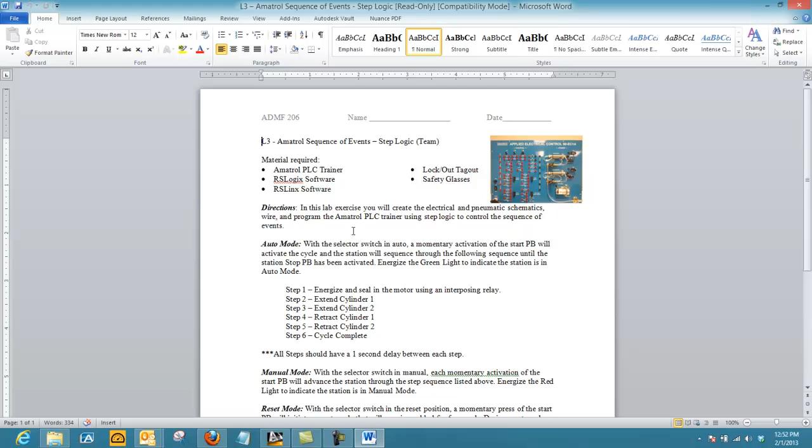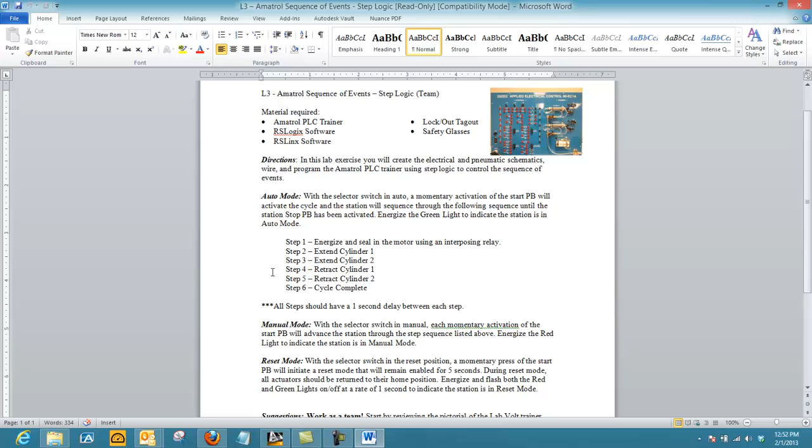So these are our objectives. In this assignment, we're going to create the electrical and pneumatic schematics, wire and program, like we said before. Here are our modes of operation. We have auto mode, manual mode, and reset mode. Here it's going to give us better descriptions of how to achieve these. But these will be our steps. Step 1 is going to be energize and seal in the motor. Step 2 is extend cylinder 1. Step 3, extend cylinder 2, so on and so forth. And we'll get to that when we start programming our RSLogix.

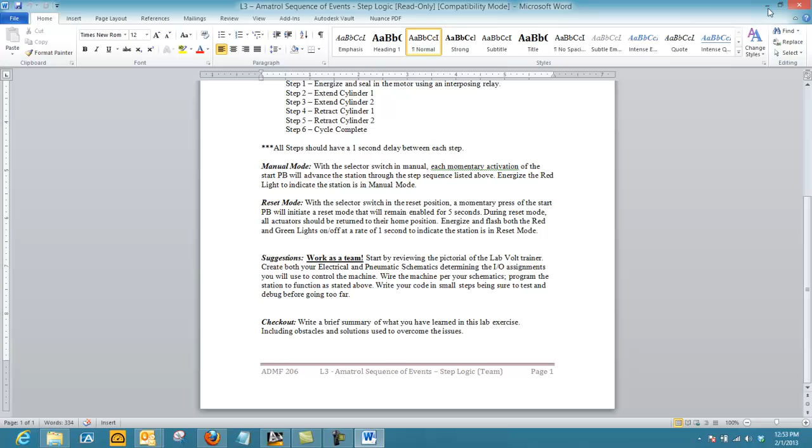So I've included a picture here so you have a reference of what the PLC station looks like. But in the suggestions down here, it tells you to start by reviewing the pictorial of the LabVolt trainer, then create both your electrical and pneumatic schematics, determining the I/O assignment you're going to use to control the machine. So that would be the first thing we're going to do. So we're going to go ahead and close this, or minimize it for now.

And I'm going to open up the AutoCAD Electrical software, which I have running already. And you're going to see it opens up with a blank screen. Just make sure that you are using AutoCAD Electrical, as noted up here in the title bar. First thing we're going to do is we're going to get a template. So we're going to click the big A up here in the left-hand corner. We're going to go to New and do New Drawing. And we're going to choose the AutoCAD Electrical and hit Open. And now you can see that that has brought up a template for us.

Remember, we can pan and zoom by pushing down the scroll wheel of your mouse. And you can see it has just changed to a hand, and I'm going to move this over by just moving my mouse to the middle of the screen. Okay, so now we're going to start adding some components, but we don't know what to add yet, so we need to go back to our assignment, and we're going to pull up the Amatrol MicroLogix 1000 JPG.

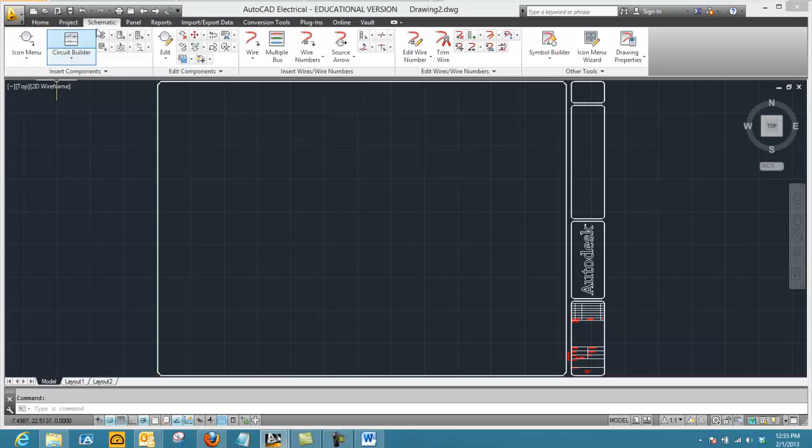Okay, and here you can see the image of the documentation that coincides with this particular PLC. Noticing here it's a MicroLogix 1000. It's a 1761-L16BWB, and that's the important information that we need for AutoCAD Electrical. So now I'm going to go back to AutoCAD Electrical, and I'm going to choose a 1761-L16BWB by clicking on the Schematic tab, then the Icon menu. And it's telling us it needs to put some information in our drawing. That's okay. Go ahead and accept that.

And I can click over here on any of these over here, or I could click over here on the images. Anytime you see a plus button associated, that means there's more information, so I expand that. And I'm going to expand this again. Now I'm going to choose the MicroLogix with a 1/2 inch spacing, but before I do, I'm going to change my schematic scale. I'm going to change this to 2.25, and then I'm going to click on the 1/2 inch MicroLogix spacing.

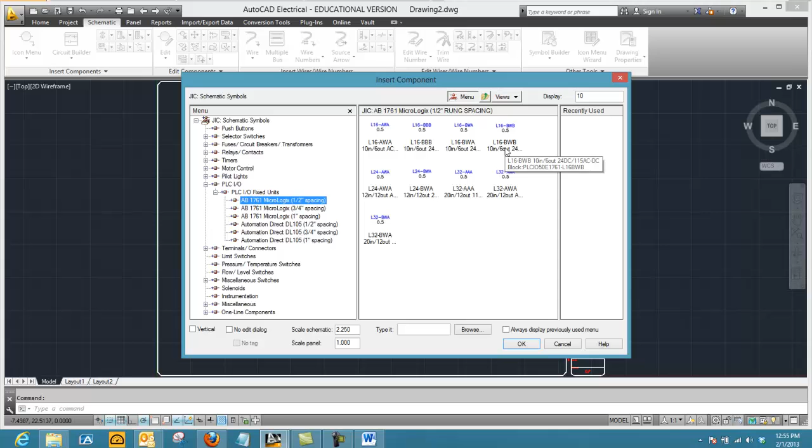And now you can see the options come up, and we want the L16 BWB. So I'm going to click on that, and you're going to notice that it comes into the drawing, and then just moving it around, we can place it wherever we want in our drawing. And we're going to place it roughly in the middle of the page, and then click with a left click.

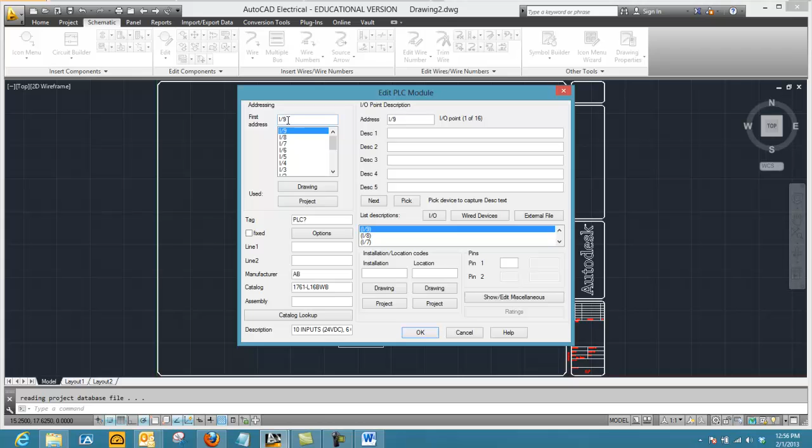Now it's coming up to edit the PLC module. We can tell it what we want the addresses to be, but for this assignment we'll just stick with the default, with the first address being I/9, and I'm going to hit OK. Alright, so that is our PLC. It is on our piece of paper. These are going to be our inputs and our output connections.

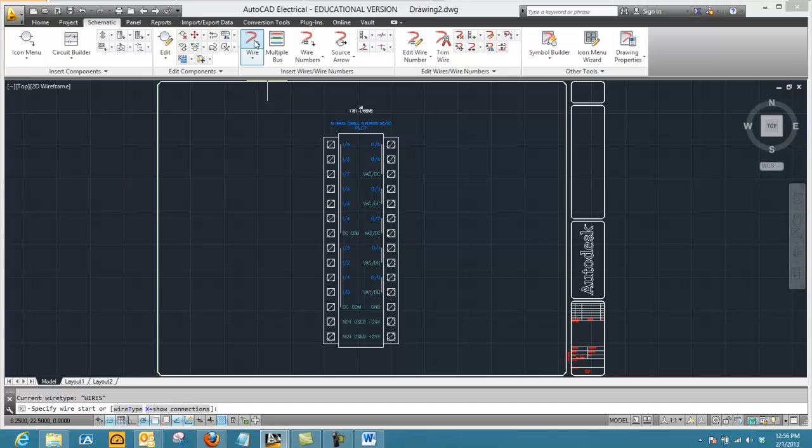And we know that it is a DC PLC, so we're going to have to add some wire connections to it. If we come up here to Wire and click Wire, that will make our wire menu active. And I'm going to come down here to the DC COM, and I'm going to zoom in so you can see it better here. If you can see right here, this is our DC common. Notice when I get over the side of it, it turns to a green hourglass. That means there's a wire connection there.

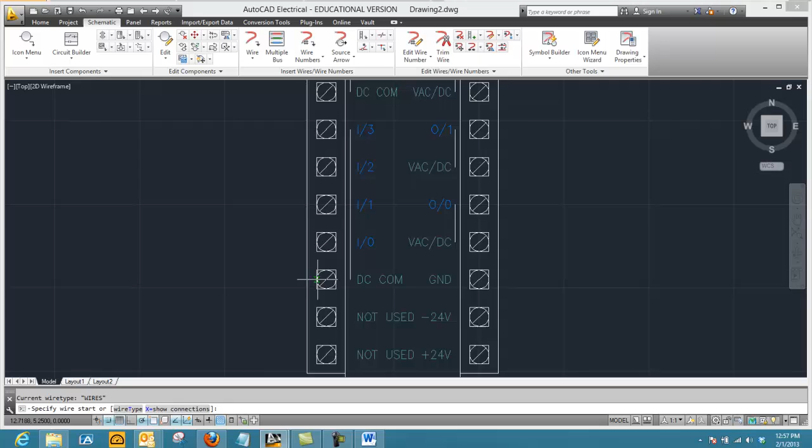So I'm going to go ahead and zoom out now, and I'm going to go ahead and click on that. And I'm going to move to the left with my mouse, and then I'm going to go up to the top, and this is going to be my L1 connection. I'm going to bring it up to about here, trying to keep the line straight, and then I'm going to left click again. Now notice if I move to the right, I've got another line. If I just hit my space bar, that will exit the line command. So there I have a line.

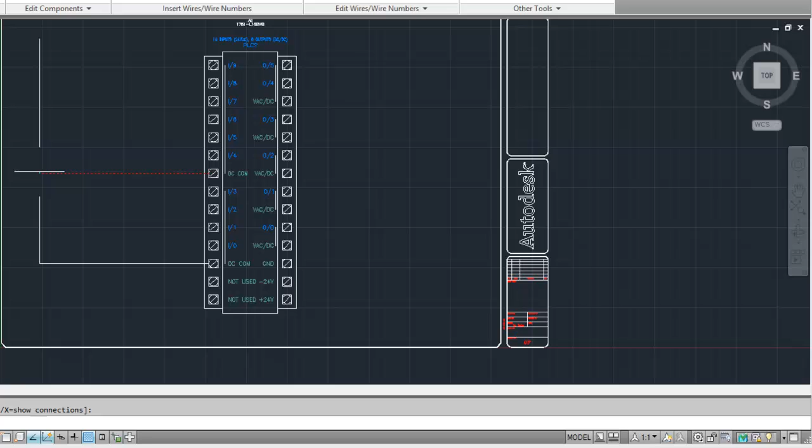I have another DC common here, so I'm going to just come over here, get on the center of that terminal screw and connect. Come over here, and when I get lined up, the line turns red. I'm going to click again. Now notice there is a wire connection there with that node, meaning that the wires are connected. Okay, so that takes care of those connections for us.

Now we're going to have to start putting in our inputs. So the easiest way to do this is come down to your first input, draw a connection, left click and hold, come over and about somewhere in here, go ahead and click again, then come up and try to keep it lined up with the top one, and click again. And now notice that I still have a line active here, so I'm going to hit the space bar.

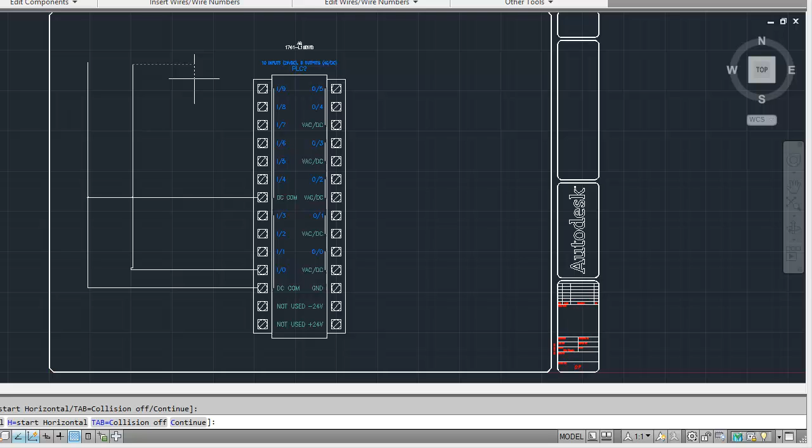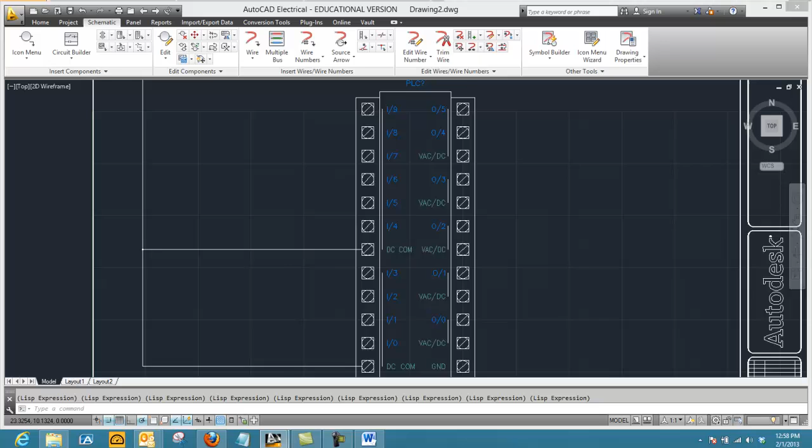But if you notice down here, I don't really like how that ended up doing, so I'm going to undo that by pressing the Control-Z key. Hit the Escape key first to get out of any active menus, hit Control-Z, and that line will go away. So let's try that line again. Remember, I'm panning and zooming, so I'm clicking the wire.

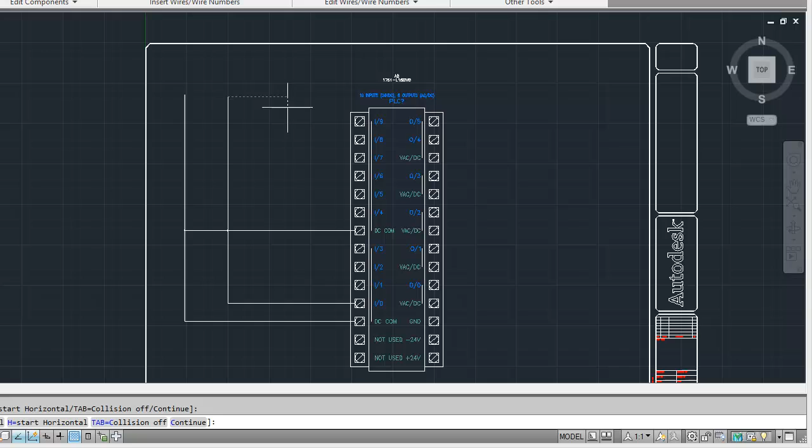And come down here, and when it turns into the green hourglass, I left click. Actually, I don't hold, I just come over here. Now I'm happy with this right about here. I'm going to go straight up. And the goal here is to try to keep that line straight. And when it turns green, we're ready to click again. And now we're going to end the command by pressing the space bar. And now you should see that those lines are crossing over, meaning the wires are not connected.

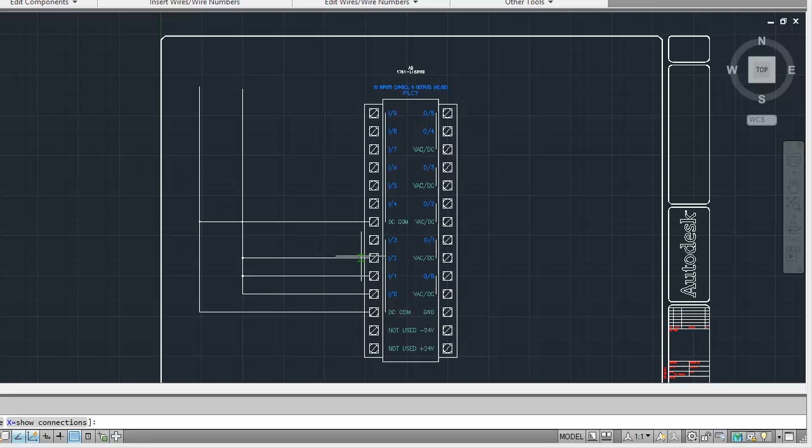Okay, so now what we're going to do is, however many inputs we're going to use, we're going to go ahead and draw the lines. So I'm going to click here, come on over, and when I get there and it turns red, I'm going to click again. I'm going to do this for about 3 of them. Click, come over. Once it turns red, that means I can connect the wires there. Click again, and I'm going to do one more. Click, and then come over and click again. Okay, so I've gotten these wires already in there.

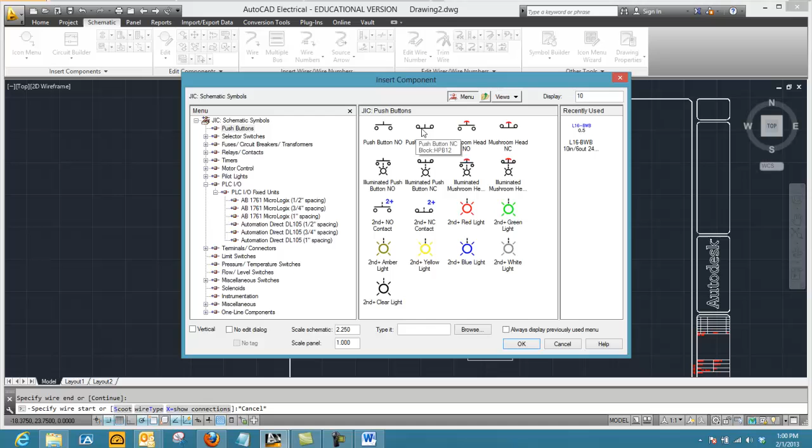Now I'm going to start adding some of the real-world inputs to it. So I'm going to click here, and I'm going to put in a push button. I'm going to start with a normally closed push button, and notice that when I click it, I have it in my cursor here, and I'm going to line this up on the vertical here so that we can keep all of these nice and straight.

And when I have it there, I'm going to left click, and I'm going to call this a stop PB. We can give it a description if you like, or you can keep it just with the component tag. And I'm going to hit OK. Now you'll see that button is in place.

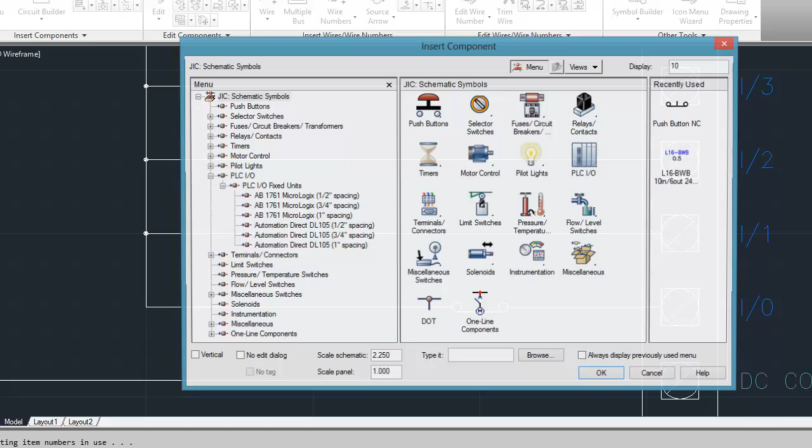Now I'm going to grab another one. I'm going to go grab another push button, and then I'm going to grab a normally open push button. Notice that I still have it in my cursor. Bring it up here on the vertical, and when I get to, whoops, we want to come down here. And I'm going to click, and that places it inside the wire. And then I'm going to hit Start PB and hit OK.

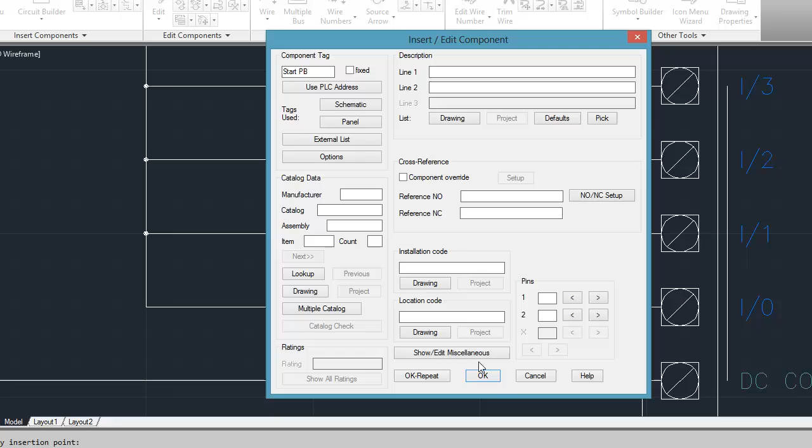So there you can see I have two of the inputs, the real world devices, already attached to the PLC card. And I'm going to let you work on adding the rest of them. So now let's go ahead and put in our outputs. Here you can see we have a plus 24 and a minus 24, which is going to be the power to the actual PLC. So we're going to start by adding a wire.

Come over here, and when we get to the middle and it turns to the hourglass, I left click, I move to the right, and just like I did before, I'm going to come up and over and keep them on the same plane as we have on the left side and click. Okay, I still have a wire, so I'm going to hit the space bar to exit that.

Then we'll do it again, come over here, and I am going to click. So I have a plus 24 and a minus 24. So I'm going to bring this one up, and I'm going to bring this over to about here and click. Okay, notice it's still active, so I press the space bar and it cancels that command.

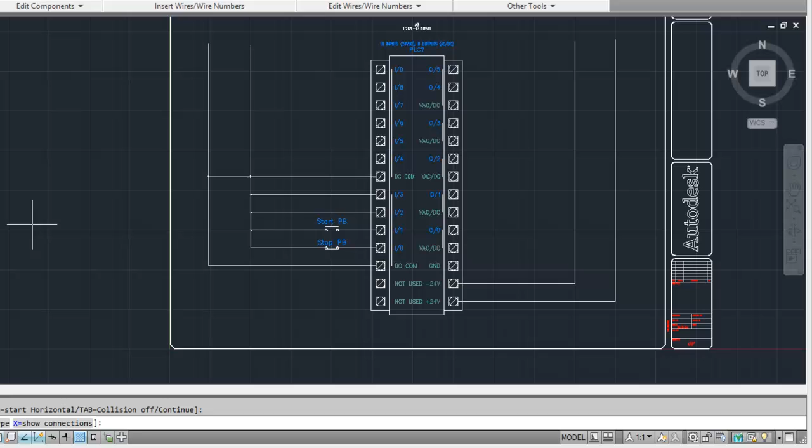So for the outputs, well, we have to determine what types of inputs and outputs we're going to use. If we look at the requirements, it says I'm going to be energizing a motor, extending a cylinder, retracting a cylinder, and ultimately having a cycle complete. So let's take a look at our trainer. Going back to Blackboard, looking at the assignment, we have the inputs here, we have the outputs here, and we have the image of the actual trainer.

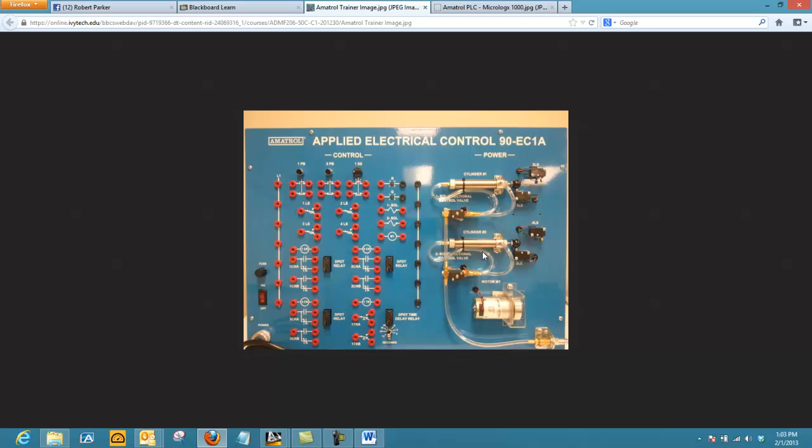So I'm going to click here, and this is our actual trainer that we're going to be programming. I'm just zooming in a little bit here. I have cylinder 1, cylinder 2, and I have a motor. I can see that these cylinders are being controlled by a directional control valve, each one having their own solenoids. So if I come here, I see solenoid 1 associates with this solenoid 1.

Solenoid 2 associates with this solenoid. The M1 corresponds to the M1 here. And we have the red light and the green light. So being the designer, we can choose whatever output we want to connect to the PLC. So I'm just going to choose a red light. So now I'm going to go back to AutoCAD.

Activate that. And I can use any of these outputs: output 0, output 1, 2, 3, 4, and 5. But notice that each output has its own volts AC/DC common. So that means that this group of outputs can use either AC or DC, and we could split them up if we wanted to. So I'm going to go ahead and grab that output now.

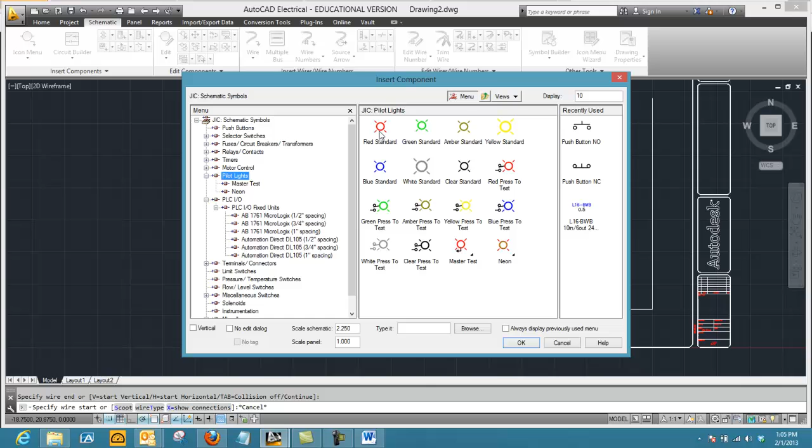If I come over here and look, I have an icon for pilot lights here, or I can come over here and click the plus button and find pilot lights here. So we have master test, we have neon, and we have just the typical pilot light menu. I said we were going to use the red one, so I'm going to click red, bring it over here, and again I'm going to try to line this up on a vertical grid bar. So we'll come over here.

Whoops, before we do that, we should have put our wires in. So I'm going to hit the escape key to cancel that, because it's easier to add the wires first. So we're going to hit the wire, come over here to output 0, come over here, and we're going to be connecting it to the minus 24 volts, which would be our common.

We'll do the same thing for this one here. Come over here and add another one, and when it turns red, that means it can make a connection there. And I'll do one more for you. We'll click, and we're going to come over and then click again. So there we've got our wires inserted and attached to the 0 volt side, or the minus 24.

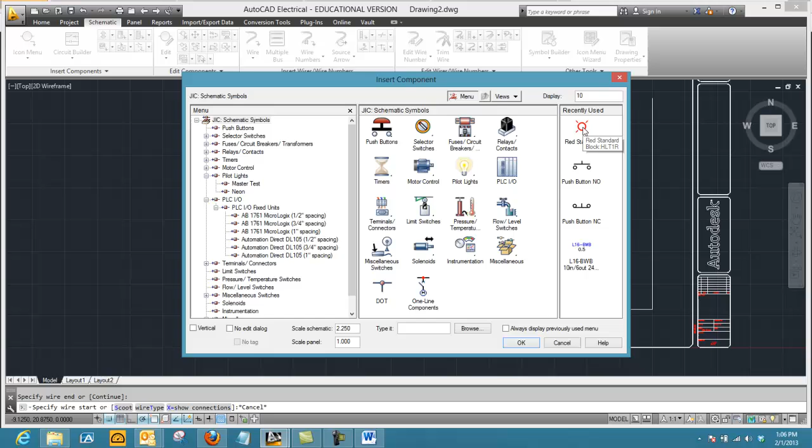So now I'm going to go back to the icon menu and get that pilot light. Notice our recently used are over here, so I could just grab this one and come over, and I'm going to insert it. I'm kind of thinking that right there might look good, but this one here, we're probably just going to go in the middle, so it seems to look best. So I click, and notice that it came in.

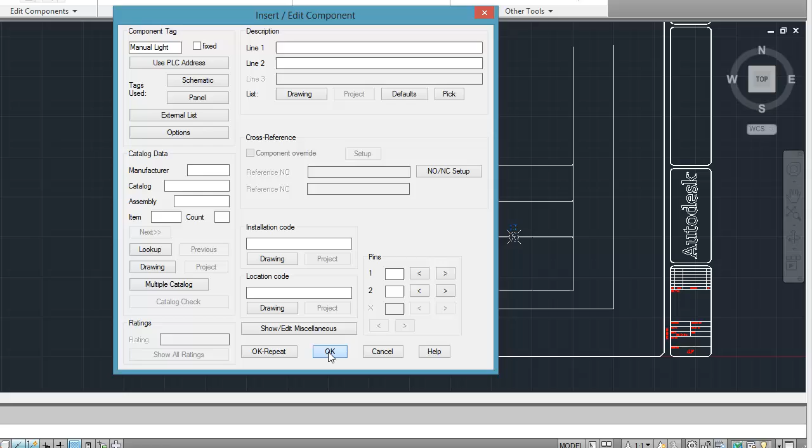And here I can call this the auto light if I wanted to, or I could call it the manual light and hit OK. And there you can see it puts the output graphic symbol in there, and it also puts a description of it. So let's grab another one.

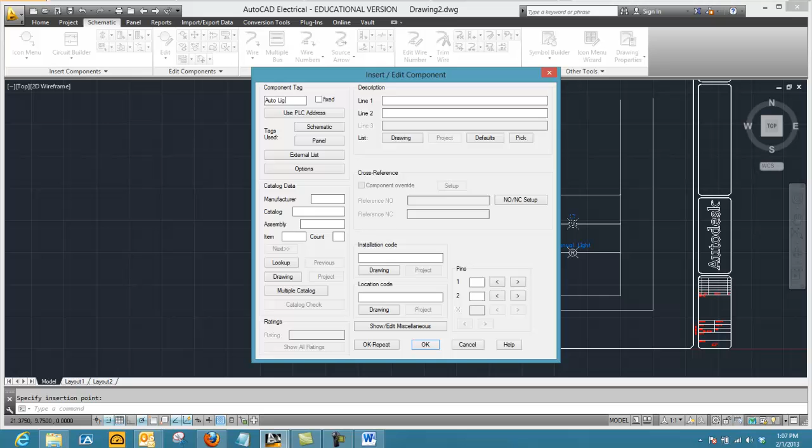And now, since we don't have the green one here, we're going to click Pilot Lights, hit the green one, come over, and again, just trying to line these up. I'm going to go ahead and click right here. And if that was manual, then I'm going to make this auto and hit OK. So I've got a red light and I have a green light.

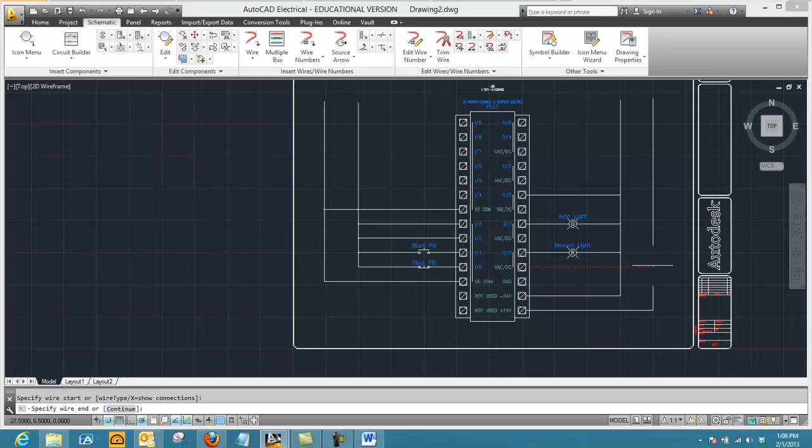Now I must connect the power to the actual module on the volts AC/DC. So I'm going to grab the wire, come over here, attach right here and click. Come over here, and I want the plus 24, and then I am going to click there. You'll see we'll have a wire connection there. See the node? Do the same thing here.

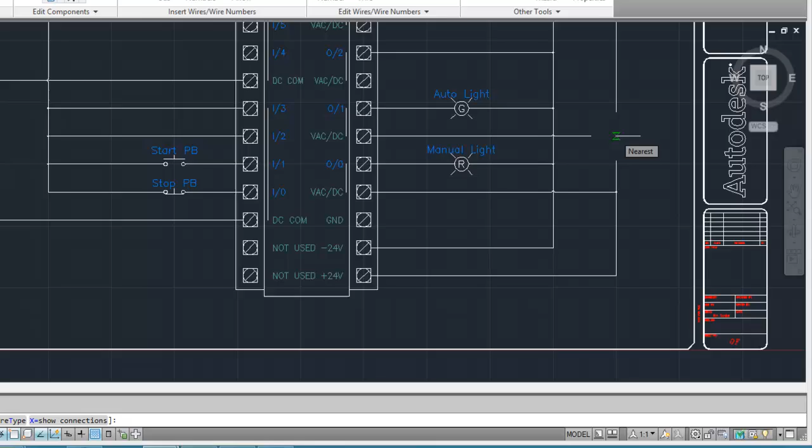Click, come over, and you're going to notice that we just go across that wire, go to the plus 24, and click again. And we have our wire connections there, and we can also see how it has jumped over the other ones, indicating that there is not a wire connection there. So adding any other additional inputs or outputs is relatively easy. It's always best to draw your lines first and then put your components in.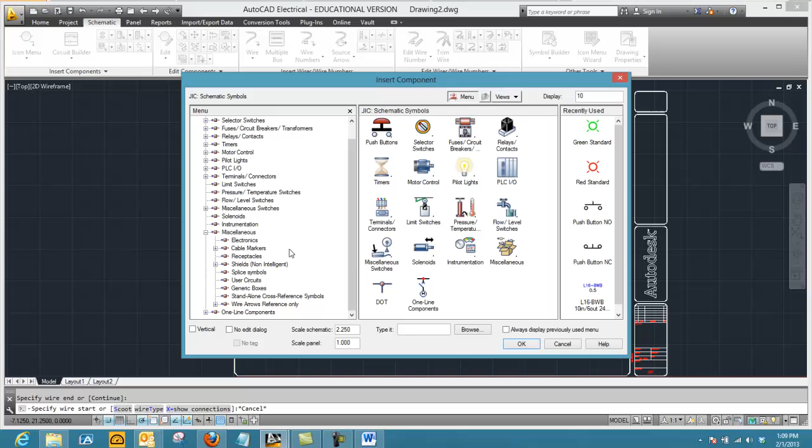Notice I have one left here. We have a ground, so we need to go into our icon menu to find that ground symbol. So we can close these out, and remember, you can drill down through all of these to find whatever content you're looking for. Hit the plus button, and I believe it is in here. If we just hit miscellaneous, there's that ground. So I can come here, click the ground,

and then I can click here as well. But notice how it may be offline now. So I'm going to undo that. I'm going to hit Control Z, which is my favorite undo friend. And then I'm going to try to put the line in first so that we can keep our lines nice and straight. Notice I zoomed in a little bit.

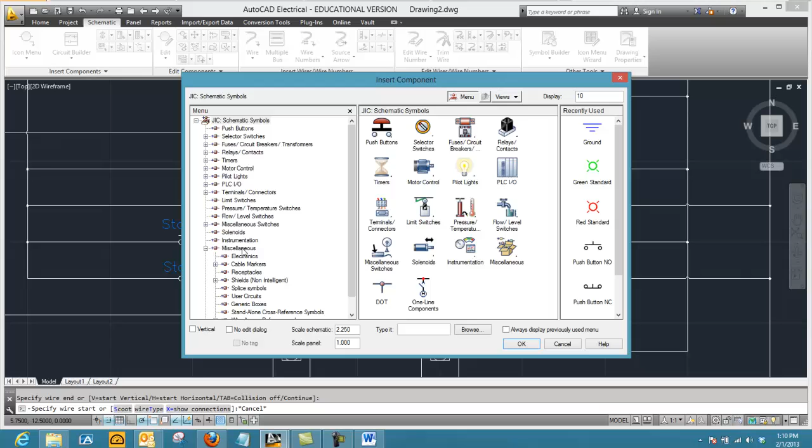I'm going to click, come out a little ways, trying to keep the line perfectly straight, and then click again, and then cancel the wire command by pressing the space bar. So I have a line now. Now it will be easier to put that ground connection in. So I click on miscellaneous, I click on ground, and then if I come over here, we can see that it wants to go right there. So I just left click, and there's my ground connection.

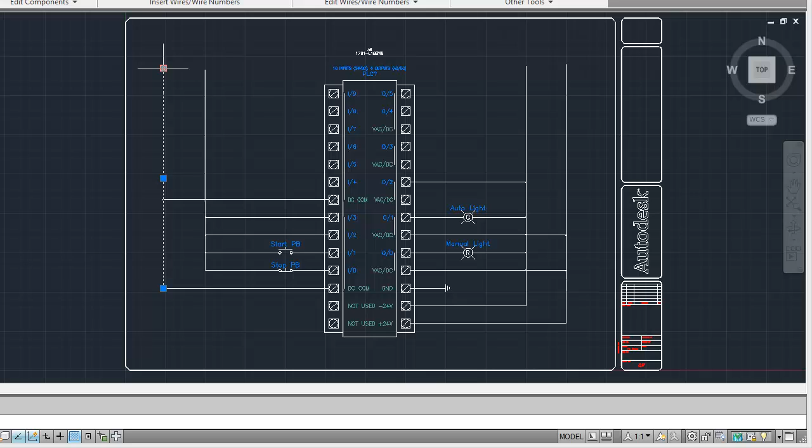Okay, notice that part of a schematic is to keep all of your inputs and your outputs perfectly lined up, your text lined up, and make it a very, very nice good looking diagram. So now we need to label these. So I'm going to click on the line, then I'm going to click on a blue square. I'm going to right click and I'm going to hit the wire number, and I'm just going to click on edit wire number.

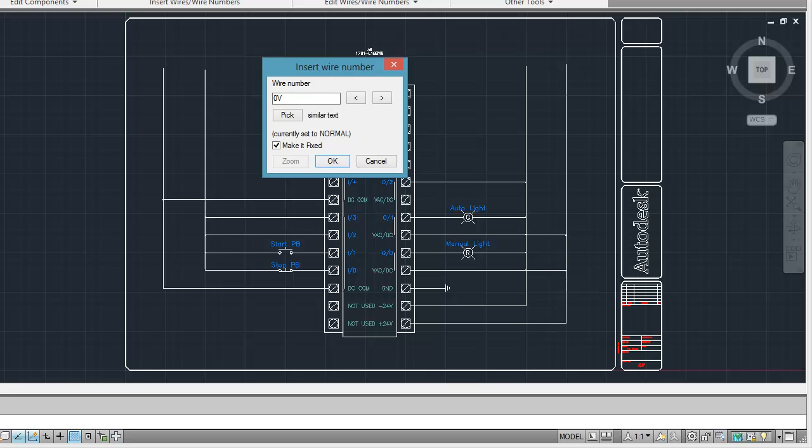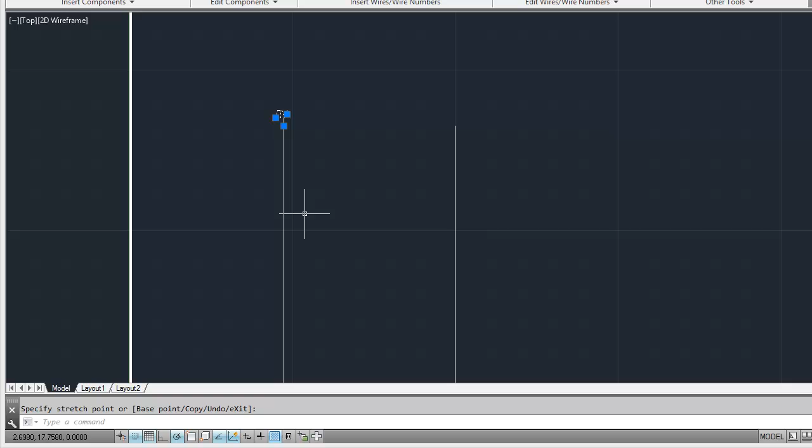And here we're going to call this the 0 volts because this is our minus connection. I'm going to hit OK. And now notice that it connects that up there to the top, and we can see 0 volts right there. If we don't like that there, we can click on it, and then left click and move it wherever we want it to go. So I'm going to click right there and let go. Now hit the escape key, and you can see I have 0 volts.

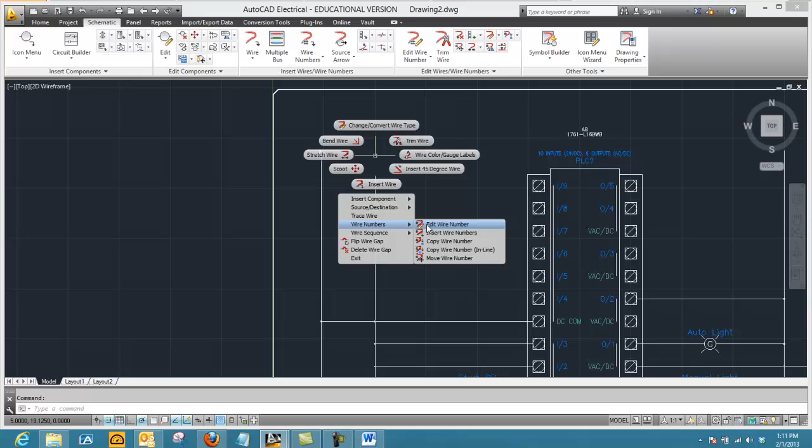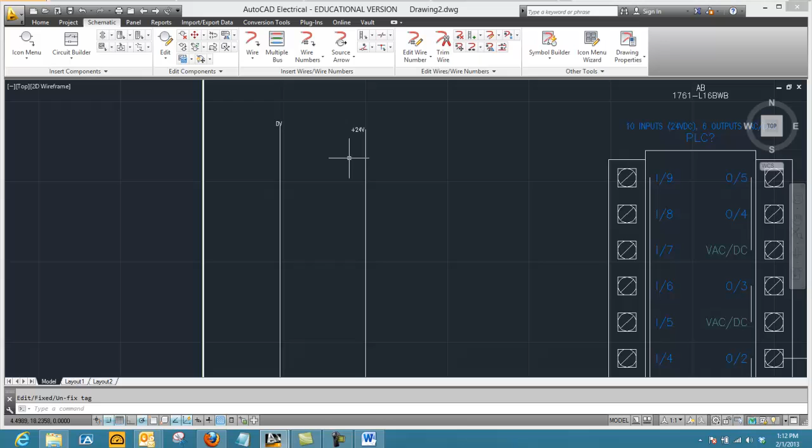Okay, and then I can click here and do the same thing, right click and hit wire number, which we're not really using as a wire number, we're just giving it a name. So we'll hit edit wire number and call this plus 24, meaning positive 24 volts, and hit OK. Now you can see that we have that in our schematic as well. If I click on it and then left click and move, I can put it wherever I want to.

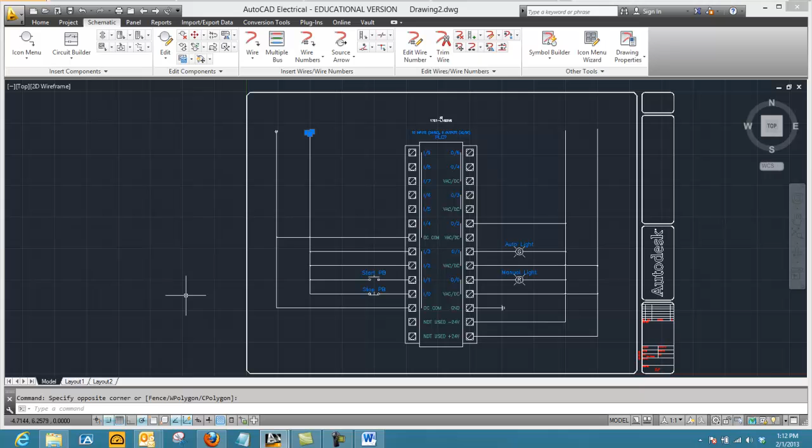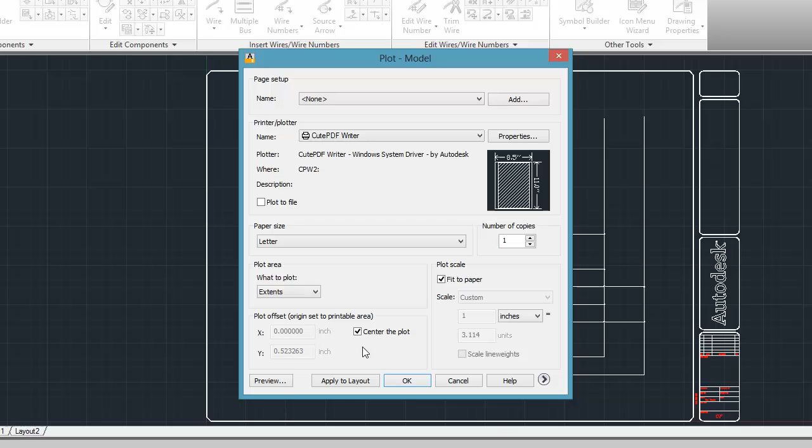Okay, so that is the beginning of your particular schematic. Now to save this schematic, come down here and right click on the model tab, hit plot, tell it what plotter you want to use - we're going to be using the CutePDF writer because we're going to turn these into PDFs. Make sure it says fit to paper, center the plot, and we have several choices here. We're going to stick with display, and you can get a preview here. Let's change that to extents, and you can see we have more area there. So we're going to hit preview.

Okay, so if you were happy with your drawing and liked how it appeared on the paper - you need to do this before you print so you have an idea of what it's going to look like - you would come up here and hit print. But before we do that, let's make another change. I'm going to close the preview window and close this, and add some information to our title block.

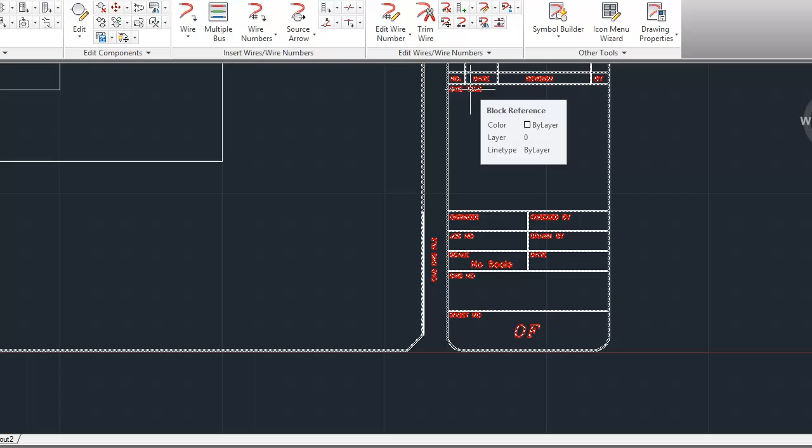Okay, if you see over here, I'm zooming in using the scroll wheel on my mouse. And if I scroll over here, notice that the images change. I can come over any of these items here, over the red, and it changes. I'm going to go to drawing title and double click, and here you can see our attribute editor pop up. Each one of these items that's editable will be displayed. So we have title 2, 3, 4, and title 1. I'm going to click on title 1 and type Ivy Tech, and notice that that pops up in our screen there.

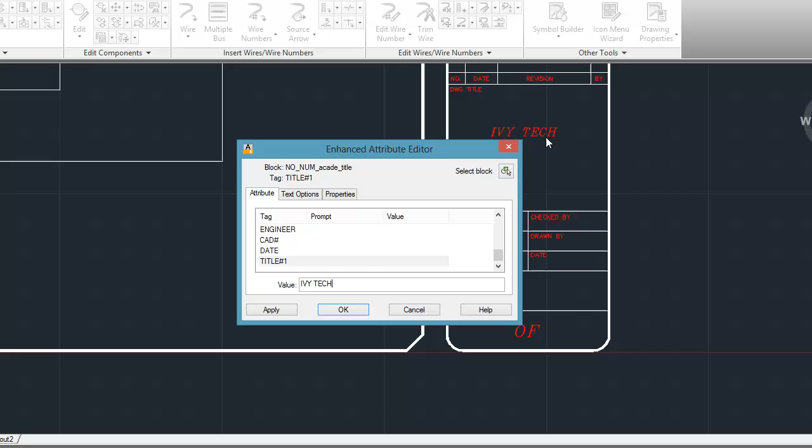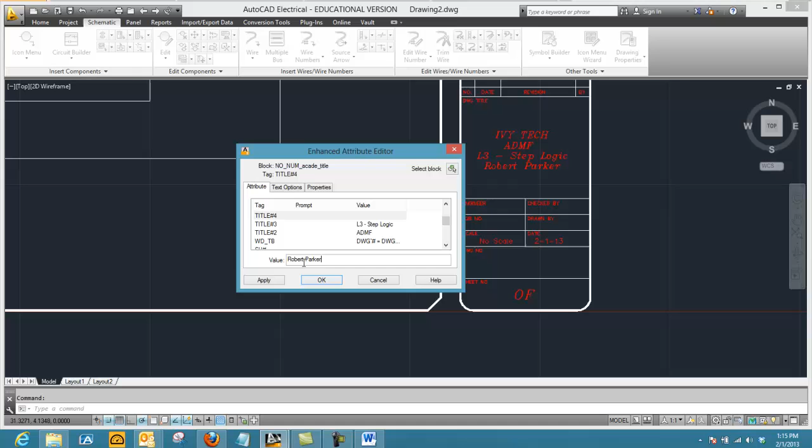So now I'm going to go to the next item I want to put in here - I'm going to put the date in here of 2-1-13. I'm also going to put another title in here. We're going to put title 2, and we'll say ADMF for title 2. Then we'll do one more title - we'll call this L3, and that was our step logic. Then for title 4, just go ahead and put your name in title 4, and we'll call that good. Hit OK. Alright, so now we have some information in our title block to make it look pretty.

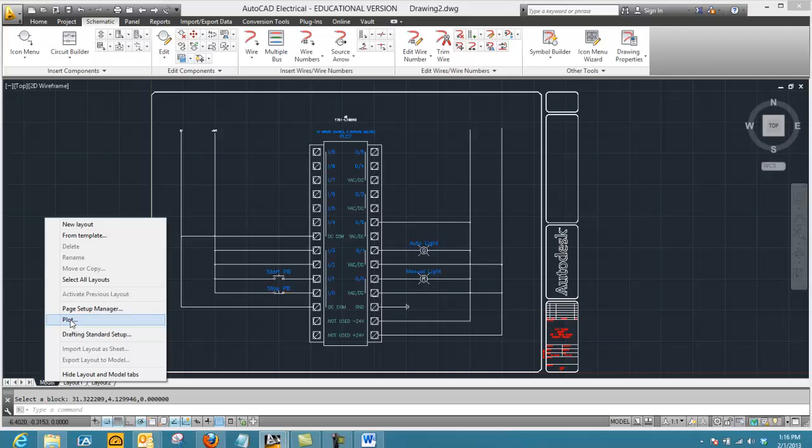I'm going to zoom out here, and push my mouse wheel down - turns into a pan and zoom. So I get that back where I want it to be, and center it. Then I'm going to right click one more time on model, hit plot, change this to the CutePDF writer, fit to the paper, center the plot, and I'm going to tell it to display the extents. Now notice it shows me up here what it looks like, so when I go to extents, it shows me that I'm going to be getting the whole drawing.

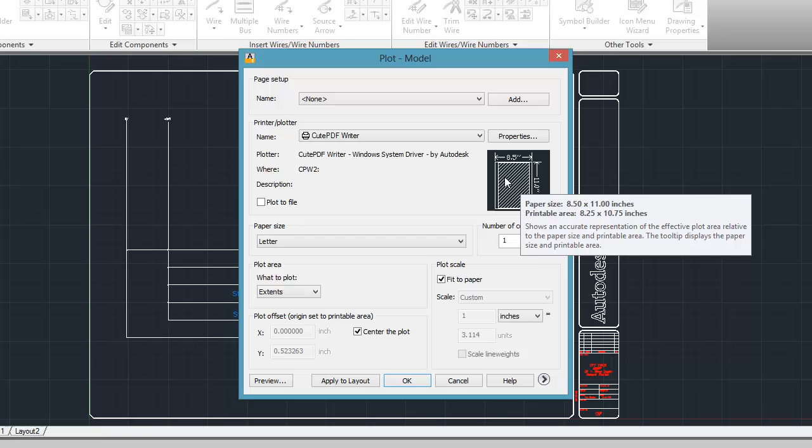And again, we're going to preview first. And if our drawing looks okay, which it does, we're going to click on the printer icon up here to tell it to plot. Now notice it says plot and publish job complete, but we're waiting for just a second till we see this come up here on the bottom, or it may come up on your screen. We must save this as a PDF file name now.

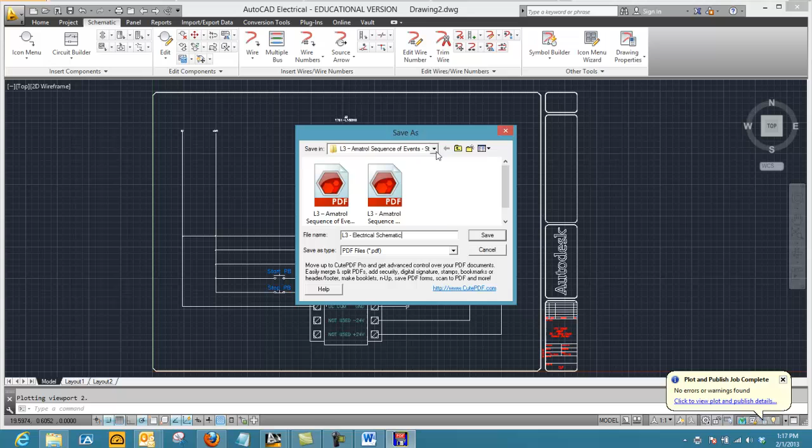So we're going to call this our L3 electrical schematic. Then save this in a location where you can remember. I'm just going to put mine on the desktop and hit save. Okay, so that's how you would insert your electrical schematics.

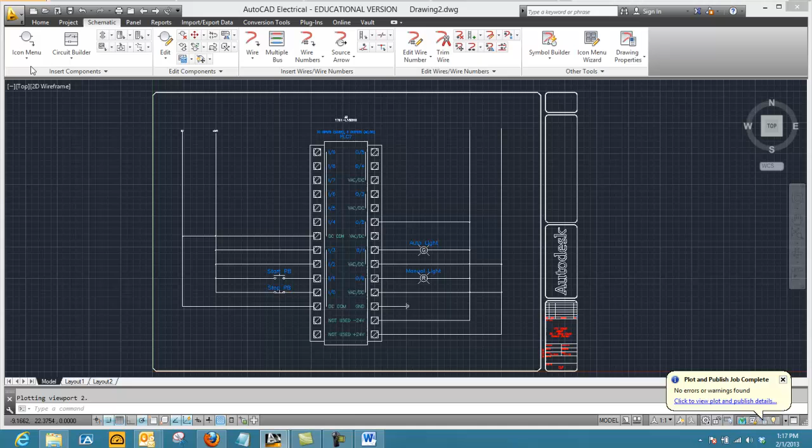Okay, so now I'm going to go up here and we're going to start all over, do a file new. I'm going to go file, new, and do a new drawing and hit open. Notice we have a blank screen now, and I'm going to position this in the center. Then what I'm going to do is click on Insert Components here, making sure that the Schematic tab is active.

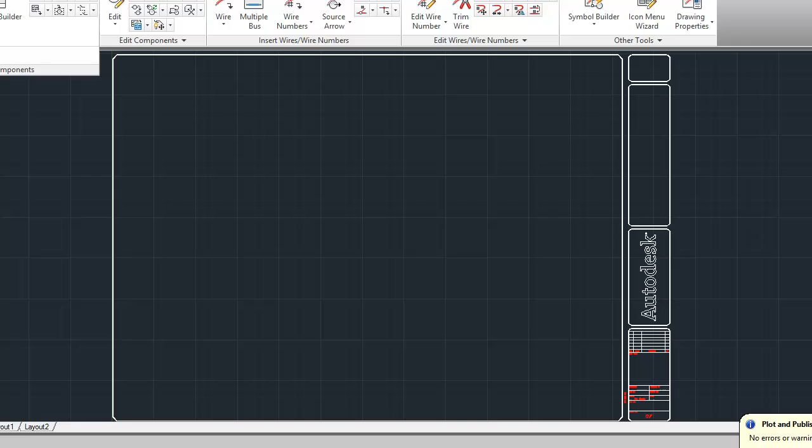If I scroll across the bottom here, it says Insert Pneumatic Components, Hydraulic Components, or P and ID Components. So we must also create a pneumatic schematic, so I'm going to click right here, left click. It wants to put information in my drawing. This is fine.

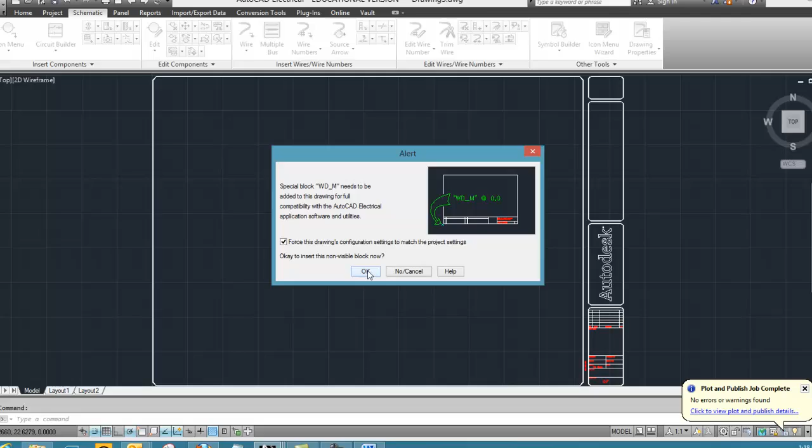Now you're going to see I get a lot of pneumatic symbols. So we got to go back to our drawing and our image of our trainer to see what types of actual control valves we have here. This is a solenoid directional control valve, and I see that we only have one coil going to it, so that means it has one coil, so most likely it is a two-position valve. So we would need to find that in our drawing.

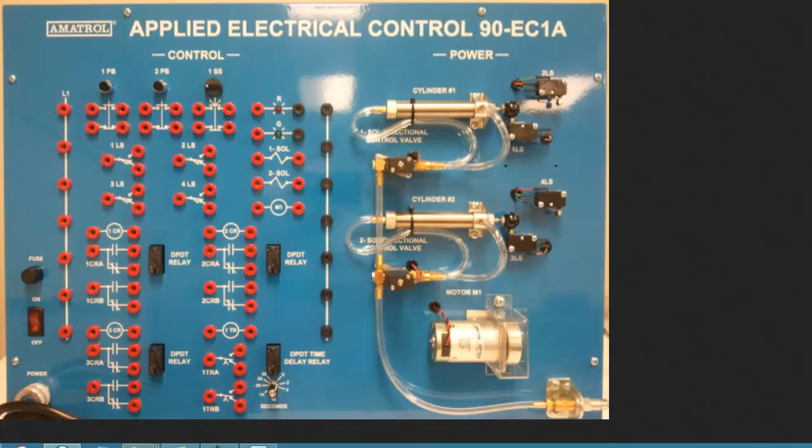So I'm going to go back to my new drawing here and find the information that I would need to create a pneumatic schematic. I can click on miscellaneous here, flow arrows, all types of different items. We could go with quick disconnects, left operators, right operators, three-way valves, and I said we had probably a two-position valve.

So we have a normally closed valve, a normally open valve. If we click the plus button here, we have four-way valves, so there was no plus button there. So we would take a two-position, and it should be a four-way valve.

So we'll just take one of these valves for now, just for illustration purposes. And notice how it came in probably going the wrong way. I'm not real happy with that valve. So I'm going to cancel that by closing the X, hitting Control Z on my keyboard, and now it's gone.

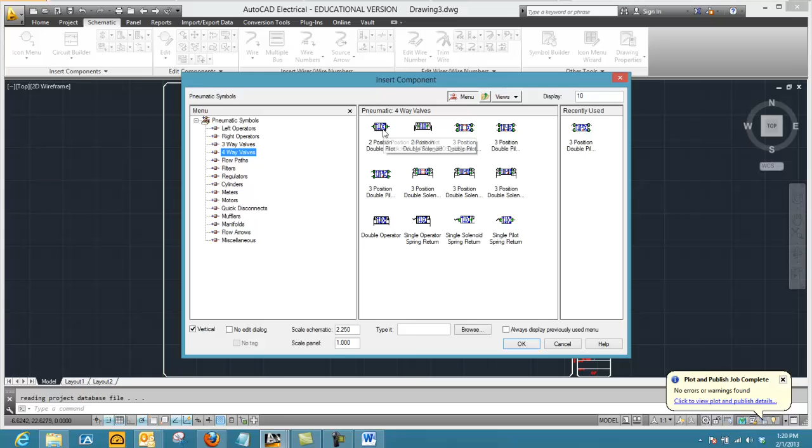So I'm going to change my icon menu here where it says vertical. This is talking about how the particular item will come in. So I'm going to change this, and then go back to a four-way valve again, and click on it. We'll go with a two position here, and notice how that valve came in with a different orientation. We'll just call this valve 1 for now and hit OK.

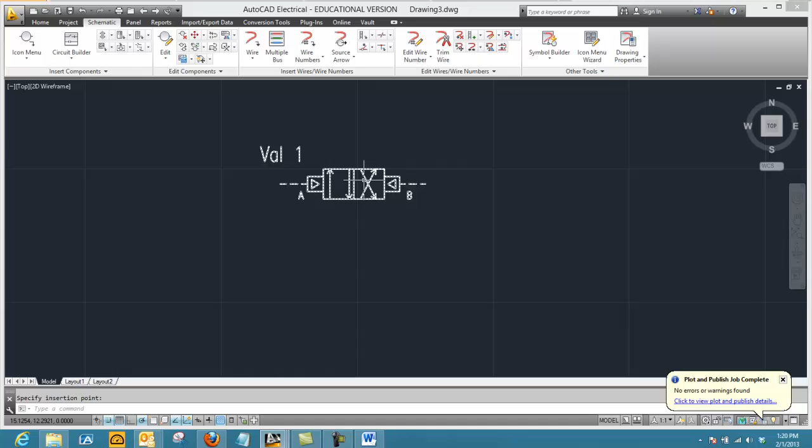So here we have a valve. May not be the exact valve we use on our trainer, but at least gives you an idea of how to insert a valve. So we have a valve there, and if that valve is too small, which it does look kind of small, let's Control Z that a couple times till it goes away. Okay, Control Z is the magic undo button. I'm going to go back to the icon menu here and let's scale this up a little bit higher.

Let's go to 3.0. We'll go with a 4-way valve here. And 2 position, 3 position, single solenoid spring return. I think that's the actual one we have on our trainer.

So we're going to click this guy here, bring it in. Okay, and if you're happy with that overall size, we'll call this valve 1 again. Hit OK. So now we've got a valve there.

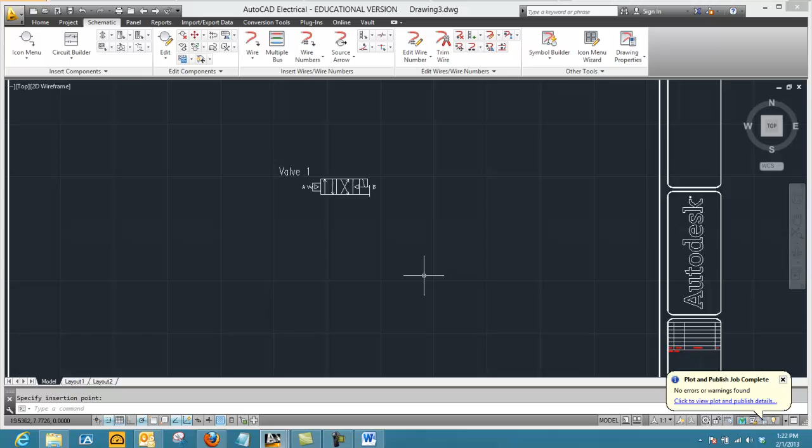So if we wanted to add more things to it, we could go and find a cylinder now. We could do a double acting cylinder with cushions, without cushions, etc. So we'll just grab a cylinder extended here, and we would maybe place it up here. And hit OK. I'm just going to leave the cylinder name alone there.

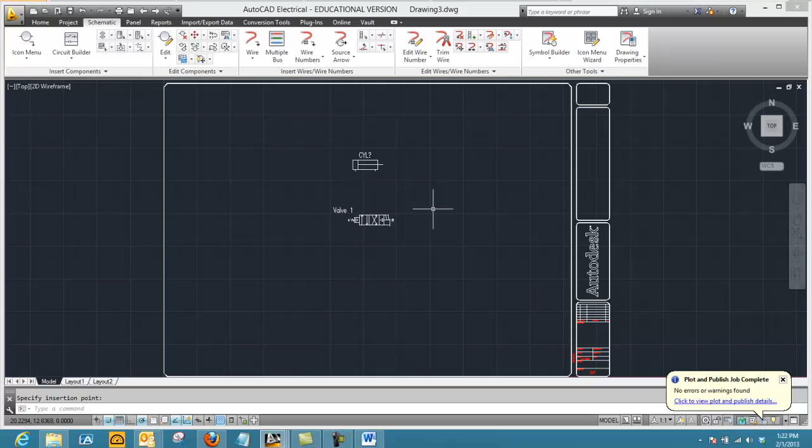Now, these aren't wires, but they're going to actually be terminal connections. So I'm going to connect here, come down, and then connect there. And then I could connect the next one, come to here, and then bring it down and connect to there. So now you can see how we would connect our particular plumbing lines.

So we go back to the icon menu. We need to find a power source. Let's click here on our pneumatic symbols and see if we can get the icon menu. I don't see that. Sometimes we can look in the miscellaneous items.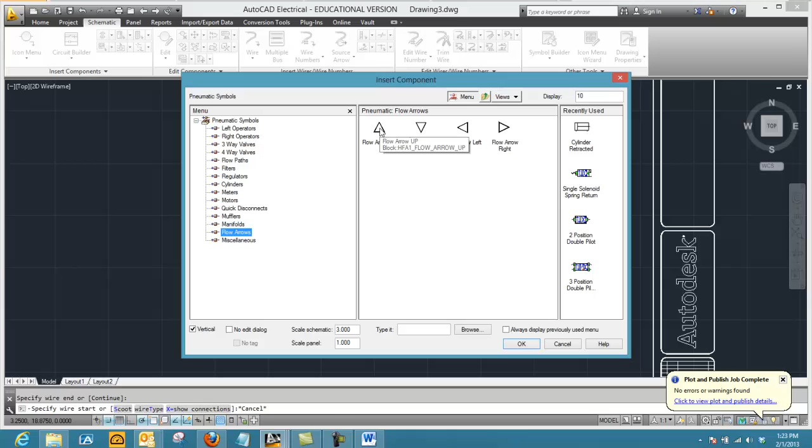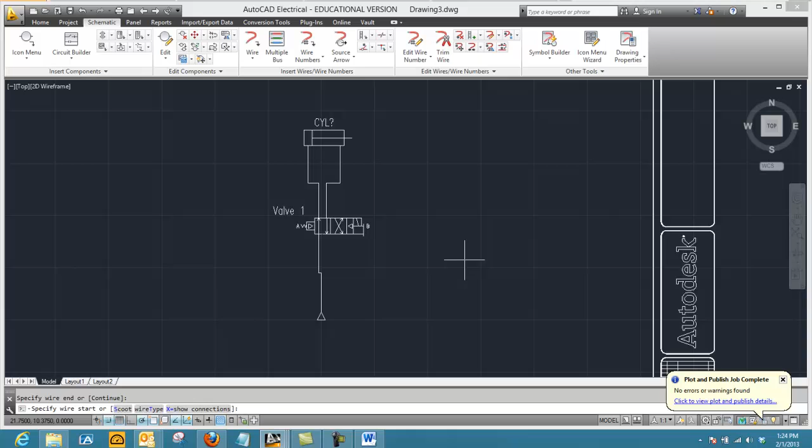And you can even cheat sometimes by just putting in a generic arrow here indicating that it's a power source, which is what we'll do. We'll just come up here with a flow up arrow, and then we'll add a wire there, bring that up, connect it to there. We have that flow connection now, and we would need to just add an exhaust here. So here you can see how we get the basics of creating our pneumatic schematics. Just like our electrical, you just grab the components, add the wires.

Okay, so I hope this helps you with AutoCAD Electrical. It's a very cool tool and a very useful tool in the creation of schematics.